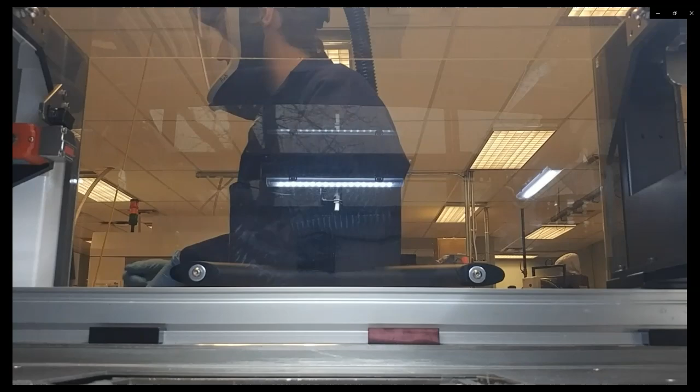At the core, additive manufacturing is the process of joining units of materials to make parts from 3D model data, usually layer upon layer. Designs come to life in front of the machine operator.

Binder jetting is an additive manufacturing technology which uses powders as raw material. The powder materials can be metal, ceramics, or polymers. These systems work well even with highly irregular powder morphologies, which makes binder jetting a highly versatile manufacturing process.

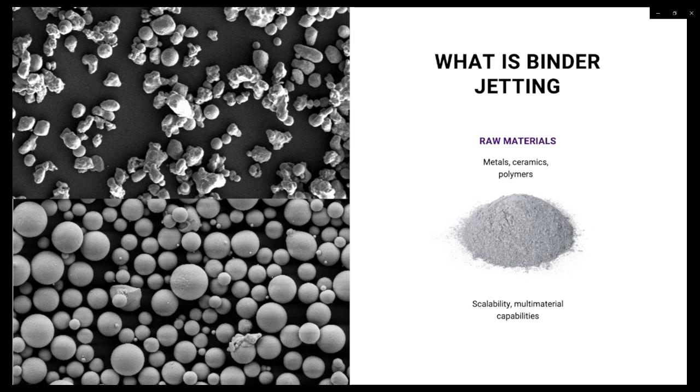It also has unique advantages such as scalability, a wide range of material compatibility, and the ability to vary material properties in different locations of a single printed part, all of which can be leveraged in industrial and biomedical applications.

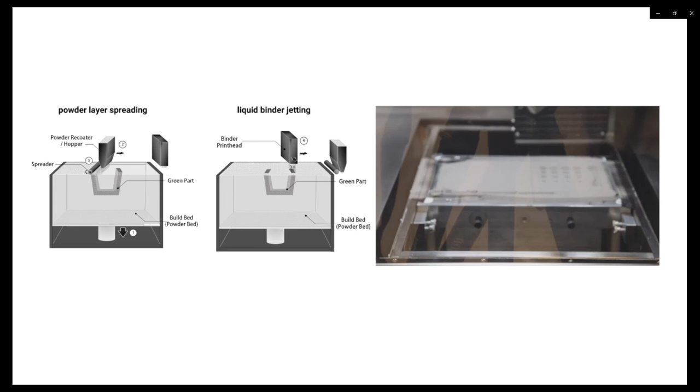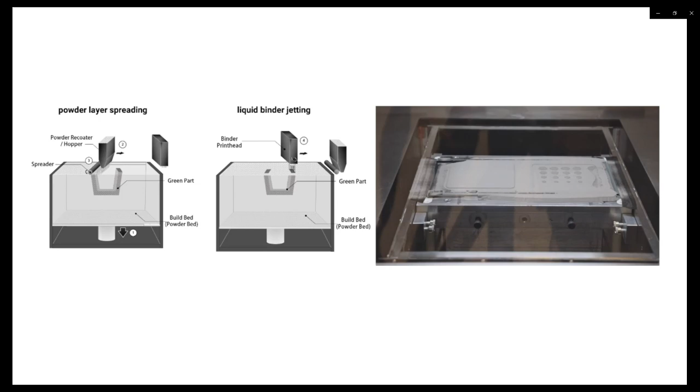In binder jetting additive manufacturing, the principle behind part fabrication relies on the sequential spreading of thin layers of powder, which is done using a roller, where a typical layer thickness is in the range of 50 microns. This is followed by selective jetting of a liquid binder or glue using a printhead. The printhead jets the binder at the location corresponding to the part slice being printed. This process is repeated until the final geometry is complete.

Now that we know the principle behind binder jetting, let's take a closer look at the binder jetting additive manufacturing workflow. The first step is component design, done in computer-aided design environments. Once the designs are completed, they are transferred to the binder jetting machine for its so-called green part manufacturing. Here, the part orientation and custom process parameters are programmed, and parts are produced in a layer-by-layer fashion.

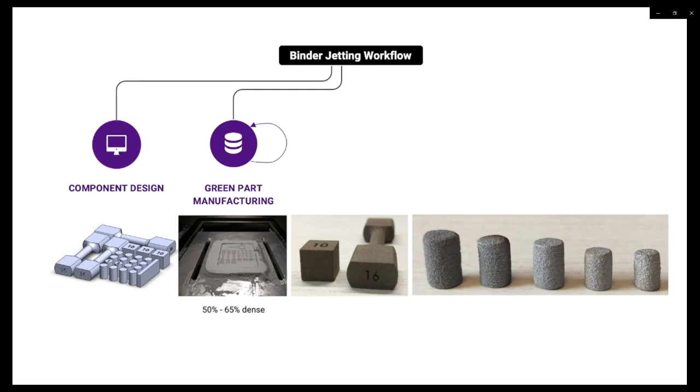It is often necessary to iterate and optimize process parameters to improve geometric fidelity and green part density. Parts in this state are between 50 to 65% dense. Once the green parts are manufactured, the binder or glue is cured by exposure to heat, either inside the machine or in a curing oven, and the parts are depowdered and cleaned.

The most complex part of the binder jetting process are the heat treatments. For binder jetting of metals and ceramics, heat treatments at high temperatures allow powder particles to fuse together and for the material system to densify. Typical final densities range from 85 to 95%.

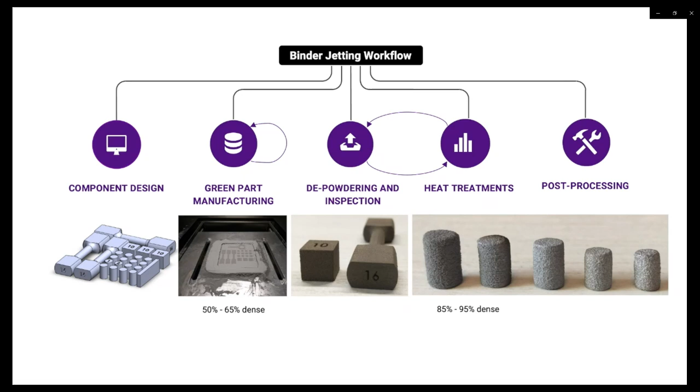In binder jetting, due to the heat treatment and densification process, distortion may occur. It is common that binder jetting components undergo post-processing steps, such as media blasting, machining, and infiltration. Let's take a closer look at each step.

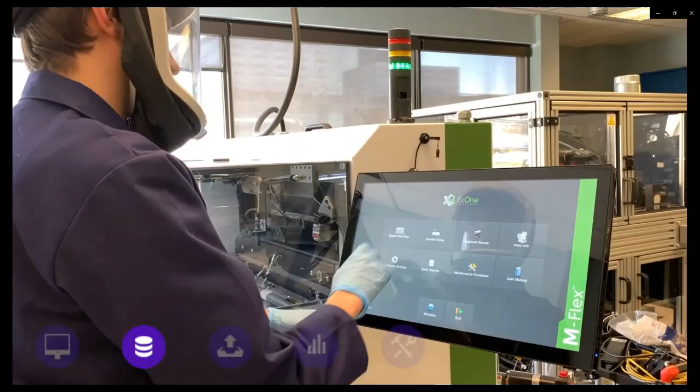Digital file manipulation, part orientation, and process parameter setup. Each material and design will have its own optimized process parameter library.

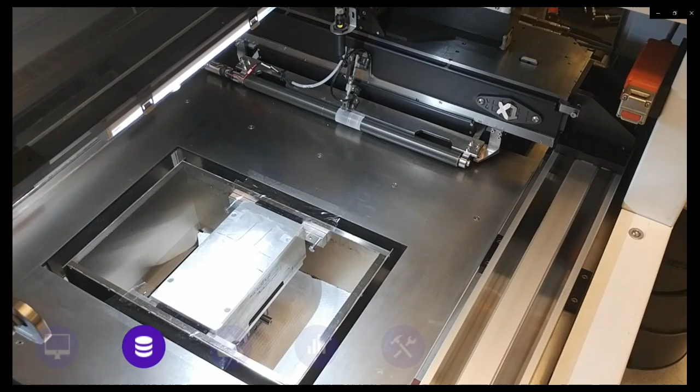The machine operator, depending on the material type, can load powders into a hopper system to dispense powders onto the build platform, or the operator can manually fill a feeding bed mechanism with raw materials as shown here.

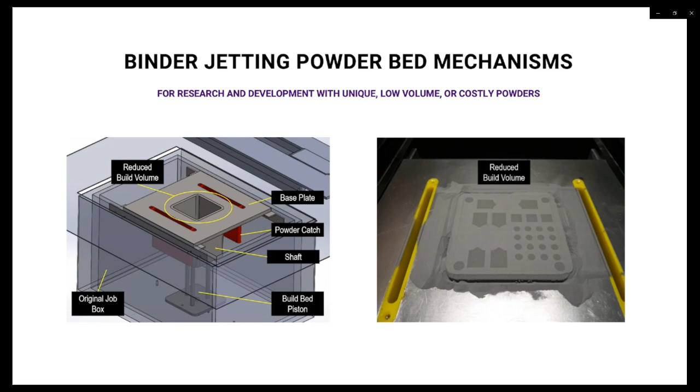Here we see an example of a machine modification to allow work with smaller quantities of powders. The build platform can be large, almost 0.5 meters, or small, a few centimeters.

Here, we see the previous layer being heated to cure the binder before a new layer of powder is spread. Then, the powder is dispensed from a hopper system at the top onto the build area, where a roller spreads it uniformly across the layer.

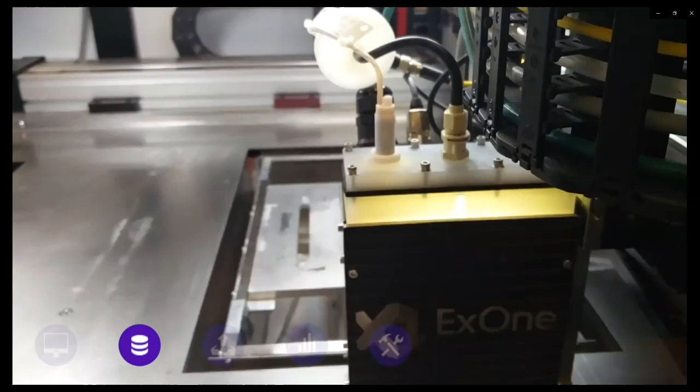Finally, the printhead jets the binder to create the part layer.

There are multiple steps to part heat treatments. The first step is binder curing. Here, we see parts going into the curing oven to finish hardening the binder or glue and allow for the part to be strong enough to be handled during depowdering.

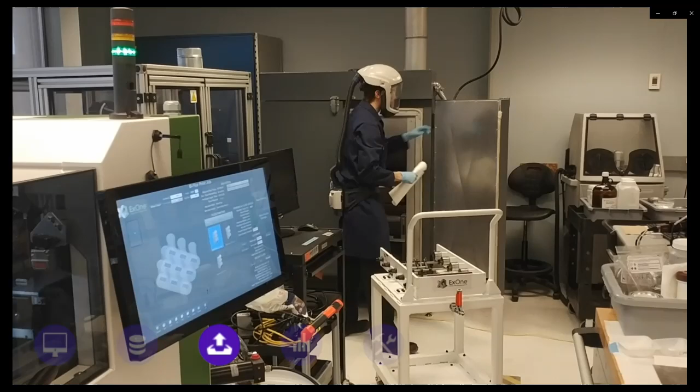The parts can be placed back in the machine after curing to depowder. Once the parts are strong enough to be handled, they are depowdered and cleaned.

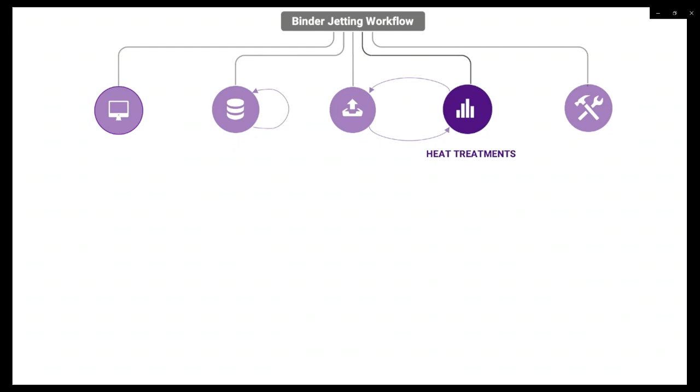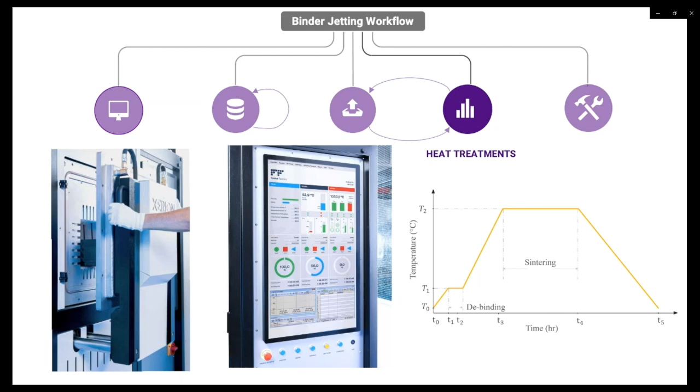The most complex set of steps in the binder jetting workflow are the heat treatments. A heat treatment needs to carefully orchestrate the time sequence of ramp up and ramp down temperatures, as well as the environment gases, to achieve controlled part densification with minimal part distortion and desired material properties.

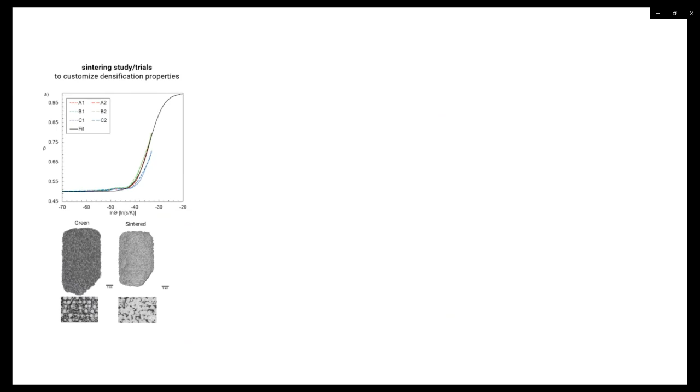Specifically, the sintering process is quite complex if we are interested in customizing both the densification behavior to control the geometric fidelity as well as material properties.

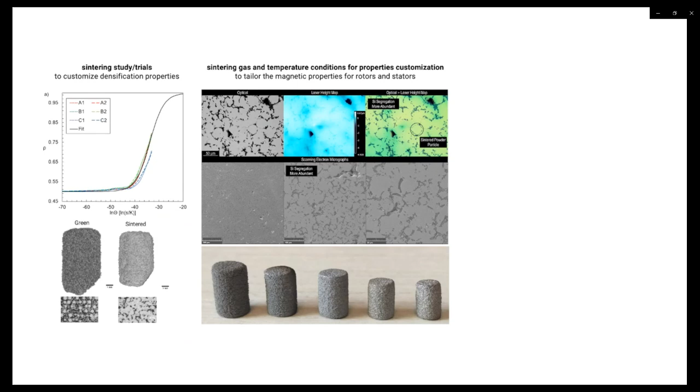For soft magnetic materials, for instance, the MSAM Binder Jetting Research Group have developed densification models to predict the shrinkage during sintering and determine geometric compensation factors to obtain shape fidelity, and are in the process of developing specialized heat treatment schedules to attain specific magnetic material properties.

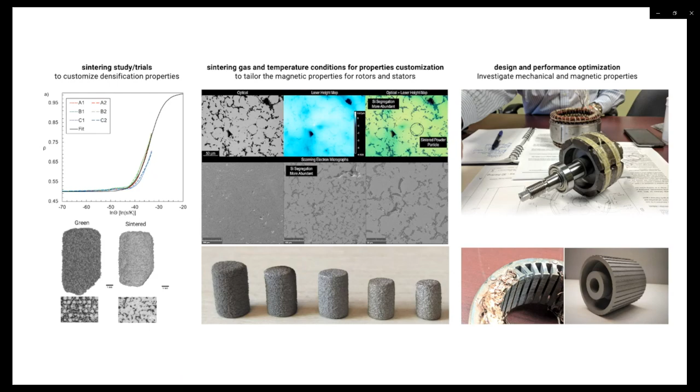The ability to control the heat treatment schedule during densification is unique to the binder jetting additive manufacturing process, and shows promise in manufacturing generator components.

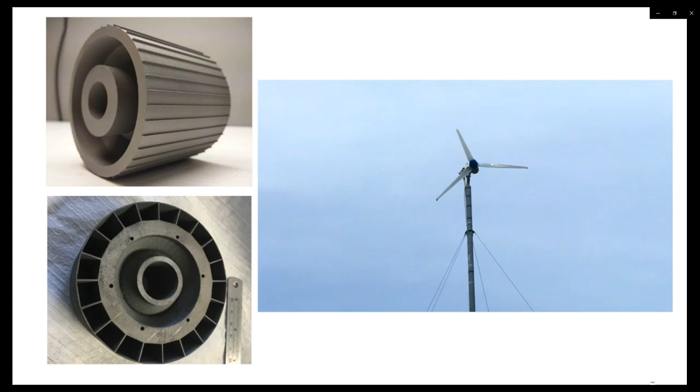We hope that additive manufacturing technologies, and binder jetting in particular, will provide competitive advantages in the energy sector, specifically for small-scale power generation.

Brilliant. Again, thanks very much to the team at MSAM for shooting all of that video and to Maria for putting it together. My take on that is there's a lot going on. It's a multi-step process. Maybe there's a little bit of a sting in the tail in terms of the heat treatments and getting that right.

I think there's a lot to be considered: the right powder, the right characteristics, the right density. How do we control the geometry? How do we get the desired magnetic response? So it seems like there's a lot of promise, maybe a broader universe of materials.

And of course, we've got the no tooling cost advantage that typically comes with additive. So we've got no tooling cost, geometric freedom, maybe material freedom too. That really opens up the design space, and there's economic promise as well with binder jetting, in terms of the speed of droplet spraying. So if we can find the Goldilocks recipes using science, not trial and error, we should be well set.

Or put another way, if you're a scientist, a statistician, an experimentalist, this is truly a multivariable optimization problem, because it's a lot more complicated than we made it look there. And as I say, this is just an intro series.